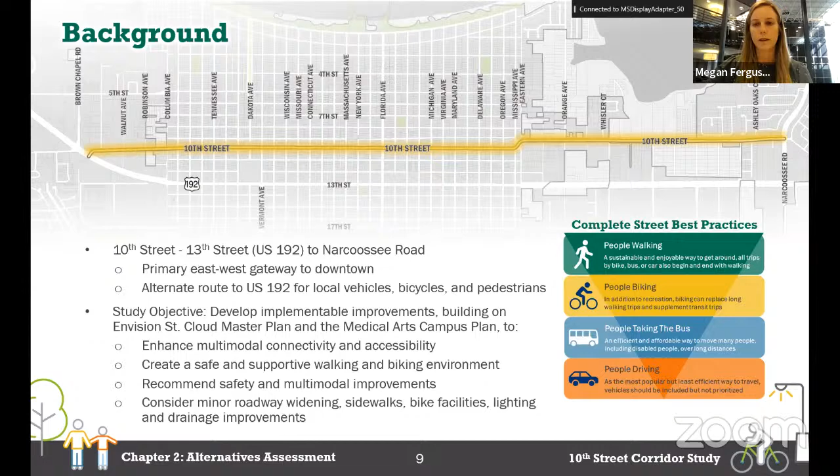One thing we wanted to note up front is that the approach is to not take any new right-of-way. We would stay within the current public realm, so there's no proposal of taking properties or anything like that.

We're on an 18-month schedule, started last January 2021, so we're about a year and change in. We'll be starting concept drawings after this meeting once we get concurrence on potential ideas, and I'll be finishing that up in the early summer.

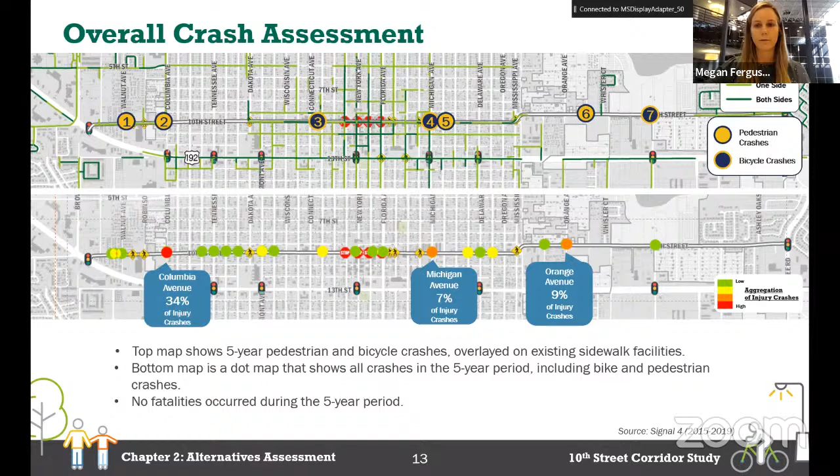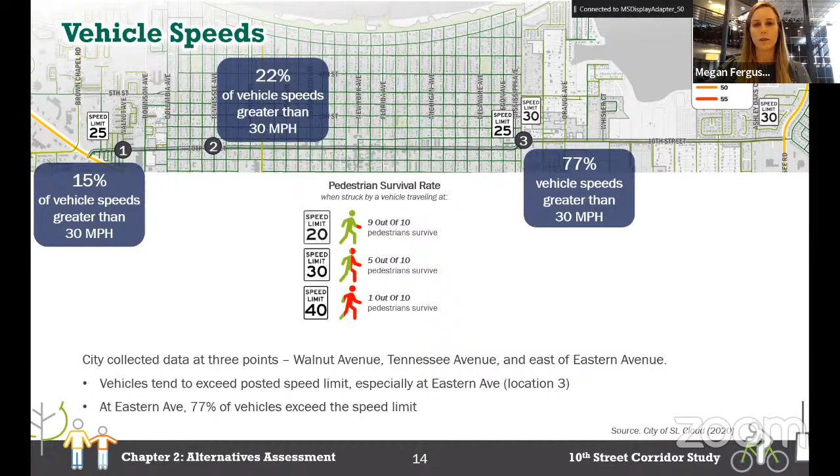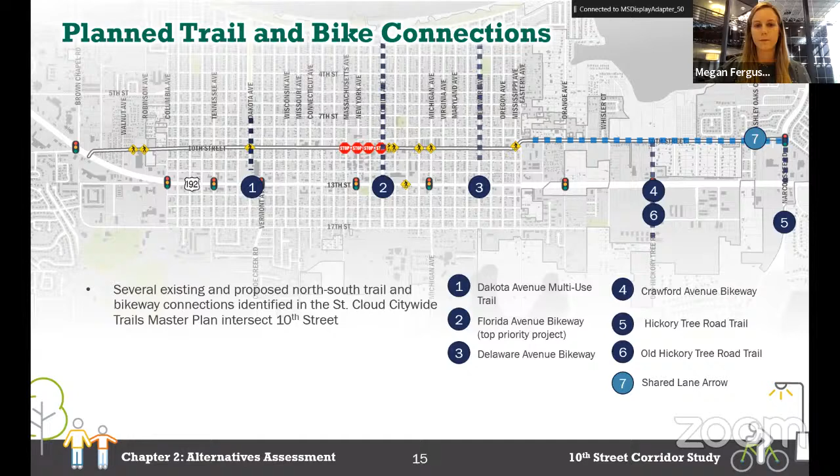All right, I'm going to hand it over to Melissa to talk about the public involvement we've done so far. Great, thanks Megan. Again, my name is Melissa Porcaro, I'm a transportation planner with HDR. I've been really focused on the public involvement pieces here with this study.

So we took those ideas and moved forward with them in our goals and objectives, as well as putting them into our alternatives.

Right now we're in the middle of our alternative survey, so some of what you'll see now the public has also been seeing, through the online survey as well as our public engagement out in St. Cloud. As of the end of the month, we've had over 250 respondents. There's been a lot of positive response about the alternatives and familiarity with roundabouts, as well as our other intersection solutions. We're hoping to get more respondents throughout the month, since the survey closes at the end of February.

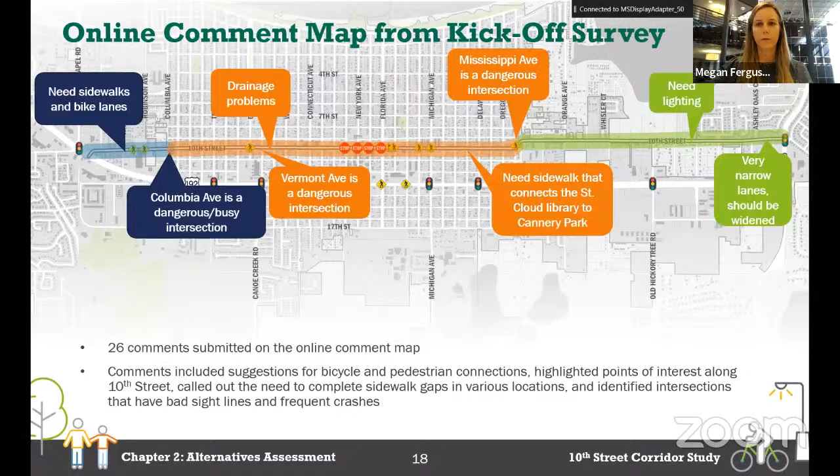So now we're going to open this up for a 5-minute discussion, if there's anything anybody wants to talk about from the project overview phase or the public engagement phase.

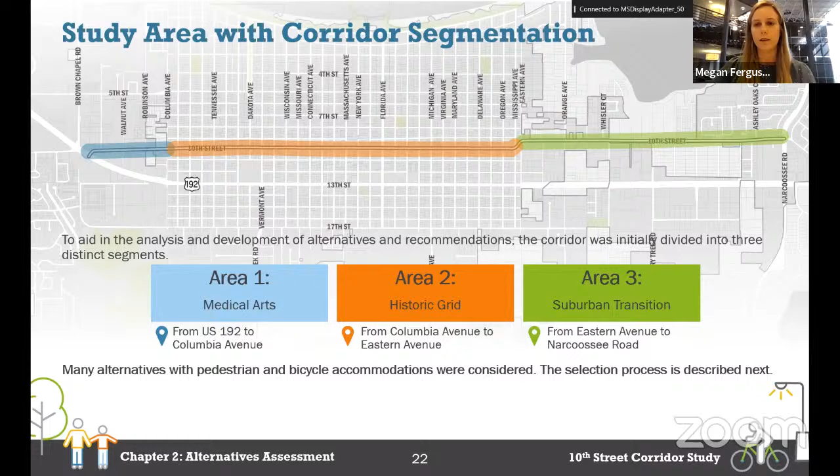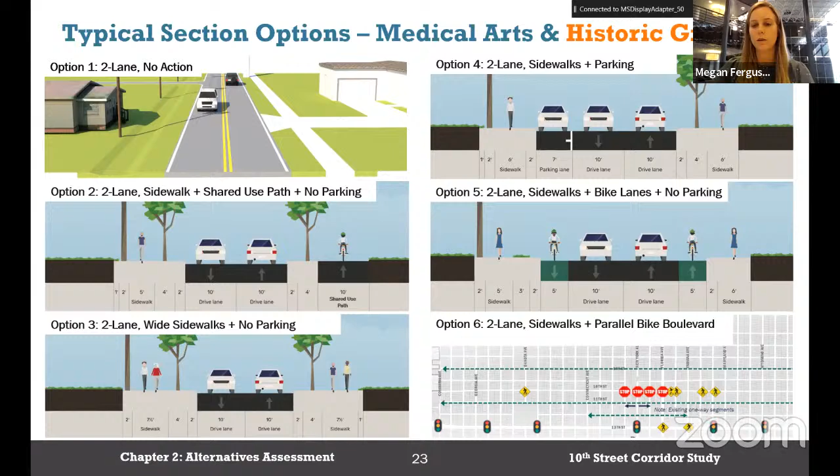In option 5, bike lanes are great because they provide dedicated space, but unfortunately we wouldn't be able to fit a buffer in, given the constrained right-of-way, so it's lower than the recommended 7-foot standard. For options 4 and 3, there are some challenges with finding dedicated space for bicyclists.

Sorry to interrupt. Yeah, people are saying your audio is not good. Could you go back to the previous slide? I think some folks were having audio issues for probably about the first half of your slide 24. Yeah, if you could just kind of re-go over the option issues.

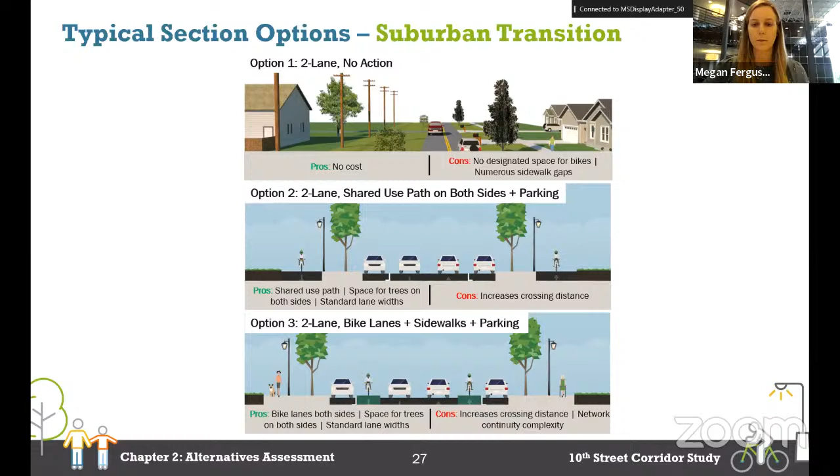So that was the thought process when looking at the menu of options for 10th Street. Through some preliminary discussions with Metro Plan Orlando and the city, we did identify that a shared use path would be the preferred alternative for 10th Street. This is partially because it could be carried all the way from Narcoossee Road to US 192.

Bike lanes are an attractive option potentially in the eastern end. It would be difficult to carry them through the orange and the blue without a buffer, and may lead to a more unsafe condition where cyclists aren't comfortable traveling against vehicle traffic.

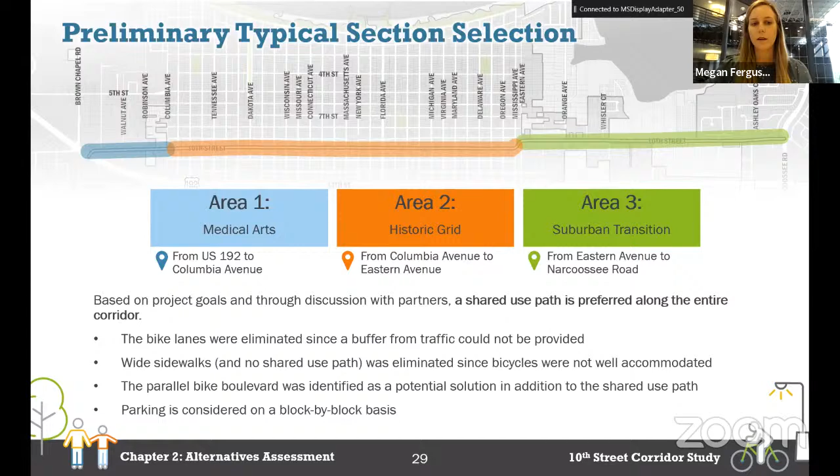We did see some value in considering parking moving forward. We know there's a parking garage going in downtown, but the on-street parking was thought of as supplementing some of the future businesses that might pop up along 10th Street a little bit outside of the downtown area. So you'll see we actually do consider that on a block by block basis.

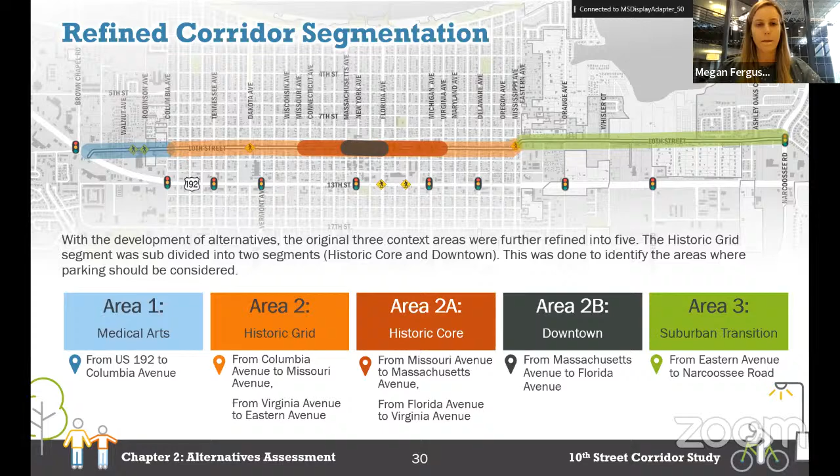We did want to note that there are some challenges with implementing the shared use path. There really would have been challenges with any of the alternatives, but these are just some that are specific to the shared use path option. And we have some images to help supplement what we're explaining here on the next slide.

The roadway center line is not directly in the middle of the right-of-way, so there's more right-of-way on one side of the road than the other. For this reason, the roadway center line may need to shift a little bit. We're talking 2 to 4 feet in some locations to make sure that we meet minimum offset criteria for any new sidewalk or any new trail that's proposed.

The original intent was also to keep the trail on a single side of the road, but for that same right-of-way challenge, it's likely going to need to cross at one location east of Mississippi and Eastern Avenue.

With the landscape buffers, we intend to make them wide enough to have trees, but we can't really guarantee that there'll be shade trees necessarily. It would be some sort of landscaping.

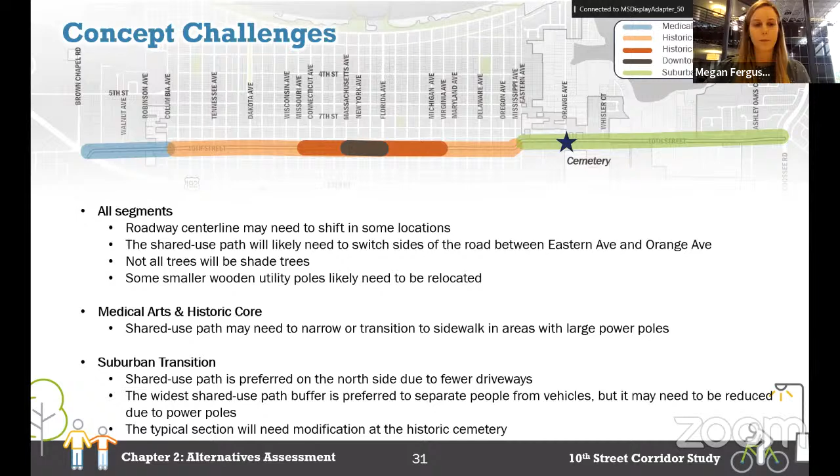So with that, I want to jump ahead to some of these pictures that explain those challenges. In item 1, another challenge would be that the shared use path may need to narrow from the preferred 10 feet down to 8 feet, or possibly even tighter in really constrained areas because of the large power poles on the western end of the corridor. We know there are wooden power poles as well, but we're considering those as able to be moved or relocated, and we'll be asking for feedback if you guys agree with that approach as well.

Image 2 shows an aerial view of 10th Street with those teal blue lines being the right-of-way lines. You'll notice that the south side of the road has more space between that right-of-way line and the road, which explains why the road may need to shift to the south in some locations.

Similarly, with item 3, see that the right-of-way is really bumped up right against the road, so the shared use path will likely need to be on the opposing side. If this is picked up for final design, they'll certainly need a survey to confirm all of these assumptions, but these are the bounds that we're working within right now.

In relation to the larger metal power poles, I know we do have a couple members from OUC on the line, wondering if they would be able to provide some insight from their end. Another comment from Paula Stark, talking about relocating the power poles probably being necessary. And then we have another chat saying the smaller wooden pole distribution poles are much easier to deal with in terms of relocating, which is what we were thinking as well.

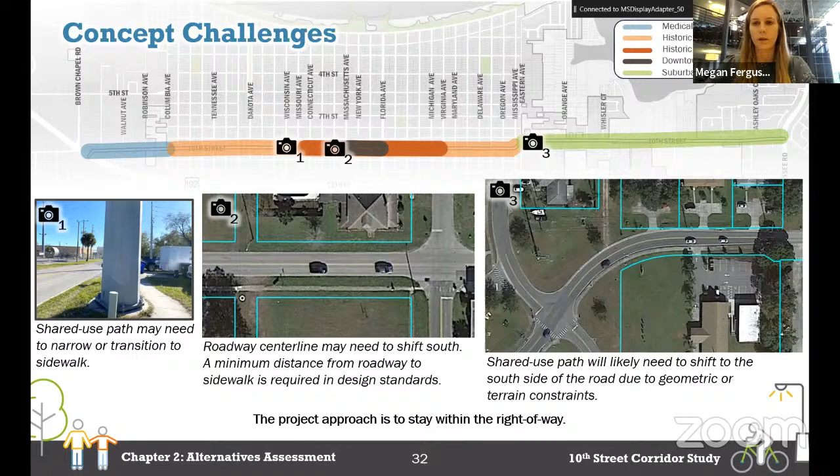So I think that's feedback we can definitely take as we advance into next step discussions with the city. Sounds like we're in agreement that the wooden power poles are eligible for relocating.

Yeah, I don't know, Adonis, if you want to give any guidance. Can you hear me better now? Is our sound better in this room, hopefully? She's asking about undergrounding them. Adonis, do you want to maybe chime in, take yourself off mute? Okay, so yeah, the distribution poles, they are certainly much easier to deal with in terms of relocating or even undergrounding. But it looks like you're talking. Yeah, we can hear Adonis on our end. Adonis, continue. Okay, I don't hear Alex. Oh, you didn't change it. Okay, all right, you guys hear me now? Yes, yes, okay, all right.

Perfect. So yeah, what I was saying is the distribution poles, which are the wooden ones you see along there, they are definitely much easier to work with in terms of being able to relocate them or even possibly look at undergrounding the lines on them. That is a much easier prospect than the steel ones. The steel ones, because they're engineered and designed poles, there would be tremendous time constraints, and we'd have to go through design engineering firms and then more than likely go to the commission for approval. So it just becomes a much longer process to deal with doing anything with the steel poles. The wooden poles, though, present a much easier option.

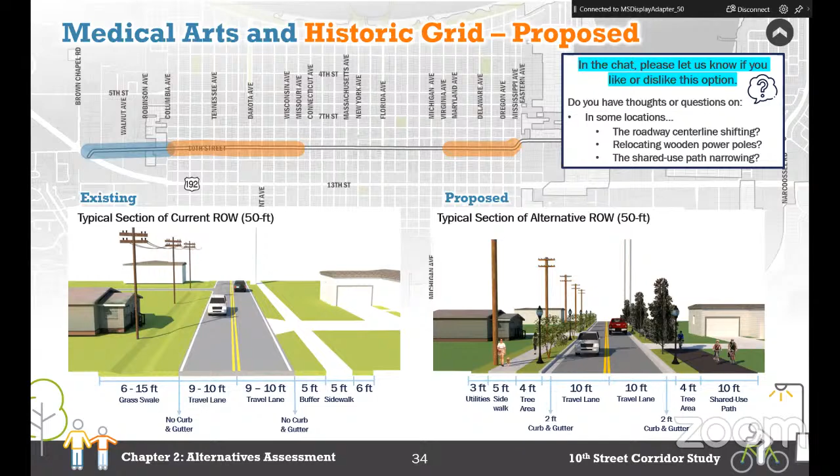Right, that makes total sense, and thank you for explaining it. Of course, yeah, we're going to get these recommendations of alternatives, and then get into the nitty gritty. Our head is just in capital improvements programming now, and I think the city is in support. We have heard regarding funding design, so that'll be within the 5 years. So we appreciate you guys helping to get us numbers that we can start to build on.

Do you want to hear from Emily now?

Good afternoon, everyone. Thank you, Jeff and Megan, for that presentation. I wanted to circle back to my comments in the chat regarding the transmission lines and such, and in certain trail projects where you can prove that this potential connection is an opportunity to not only get cyclists to be able to move safely through a community, but also pedestrians as well.

And Adonis, you seem to be a nice guy, I've never met you before, but willing to work within the constraints of improving this for the entire public. If you do have a constraint, one or two locations, maybe don't totally throw out the opportunity to move said obstacle, whatever that might be. I know there's been some creative solutions with transmission lines out west in their construction, and how they kind of sit on or straddle, if you will, the trail. So I think there are opportunities to get creative if that is constrained.

And just as a reminder too, you guys are doing an excellent job of prepping us for building what hopefully is this road improvement that will increase the likelihood of people shopping and walking and living in the community of St.

Cloud. So I think prioritizing people first, and if that means spending a little bit more money to move a transmission line to have a much better project at the end that's going to last in this community for 30 plus years, it's worth it for that little bit of extra money in the short term that we're going to have to spend. I just wanted to make that point and remind you that's hopefully why we're here doing the work we do in these communities. So thank you again for allowing me to speak. Appreciate it.

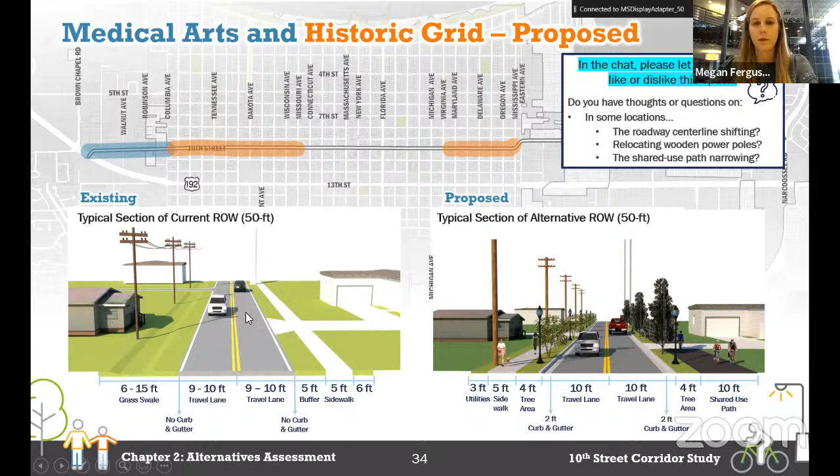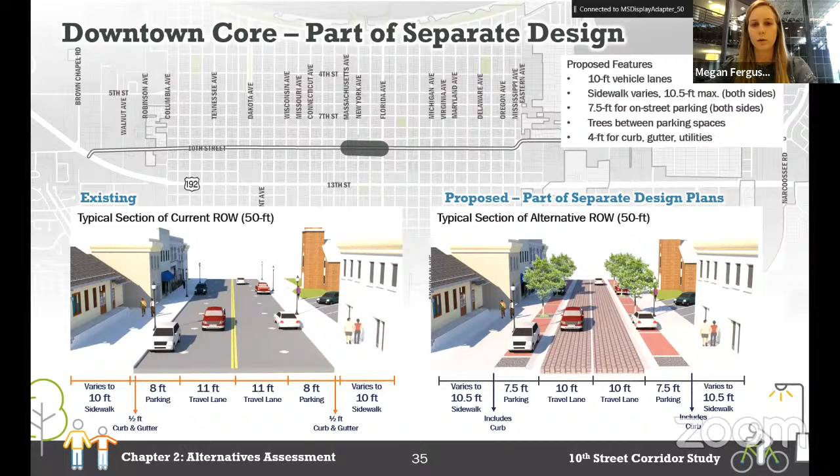Before we do that, we have this rendering of what the downtown area is going to look like. That's part of a separate project and in final design right now, shown on the right-hand side. Since that's a separate project, we're not necessarily asking for new feedback on this, but we did want to show how our potential typicals would tie into it. A good example is in the historic core in this dark orange area, where we have parking on one side of the road, which would be a continuation from the downtown parking. It was strategically added here because we know these are the bounds of the future commercial land use.

We have similar features as the last typical, which is adding new curb and gutter, continuing that shared use path, and maintaining those 10-foot vehicle lanes, which I may not have said specifically in the last slide, but some of the lanes today are only 9.5 feet. So the 10-foot is an improvement to what's out there.

So with that, we'll head back to the chat. Do you all dislike this option or have questions? We know the on-street parking and the integration of the trail with the business fronts might need to be talked through a little bit more.

Also, if anyone on the PBT has thoughts on the side of the street, you can always say which ones would be more ideal or not. It's really tough because, like Aaron talked about, that block by block approach—we don't want to make it keep crossing back and forth, and we're at that point of trying to assess that. Did anyone have other thoughts on this as far as trying to continue the path, not to connect through and then provide the parking? Do you feel like we've struck a decent balance here with this cross section?

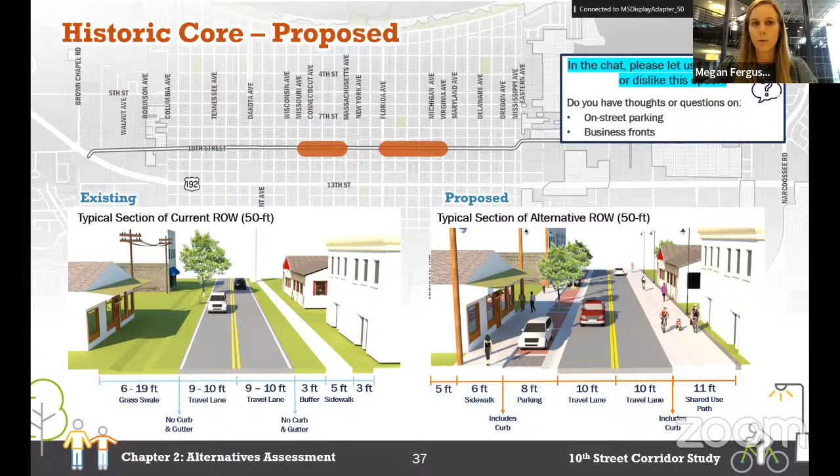The last section we have to share is the Suburban Transition, which starts just after Eastern Ave and extends to Narcoossee. This is where we have more right-of-way available. Same improvements as before, maintaining those 10-foot travel lanes, continuing the shared use path, but we have a recommendation here that the shared use path be on the north side of the road for most of the way.

There's a single driveway for the subdivision on the north side, but on the south side there are multiple driveways to private residences. So to keep the chance of conflicts low, we'd like to see the path on the north side.

We are showing pretty wide buffer areas from the roadway, with an 18-foot tree area on the left and a 19-foot tree area on the right. The approach is to get people and bikes as far away from cars as possible, but there may need to be some variations in that buffer if there are any geometric or topographic constraints.

We also note there's a historic cemetery in this area, where the buffer does get constrained back down to about 55 feet. We want to be sure not to encroach whatsoever into that area. So that's one location where we'll start narrowing the trail, possibly going to a sidewalk if needed to avoid any impacts there.

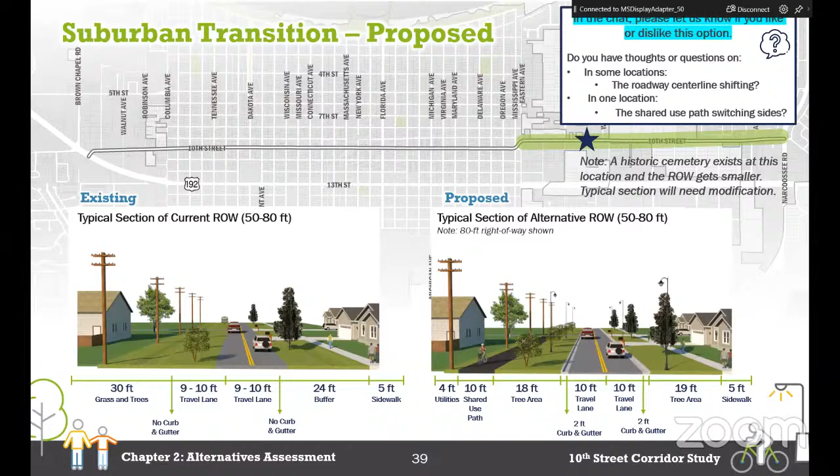And Megan, one more thought. I think I've seen the survey for the north side of the cemetery, and there's about 5 feet between the property line and the fence, and the city would be willing to get engaged in an easement there if that could get us a full 60 feet. So hopefully we can keep the continuity going. Great, thanks, Erin.

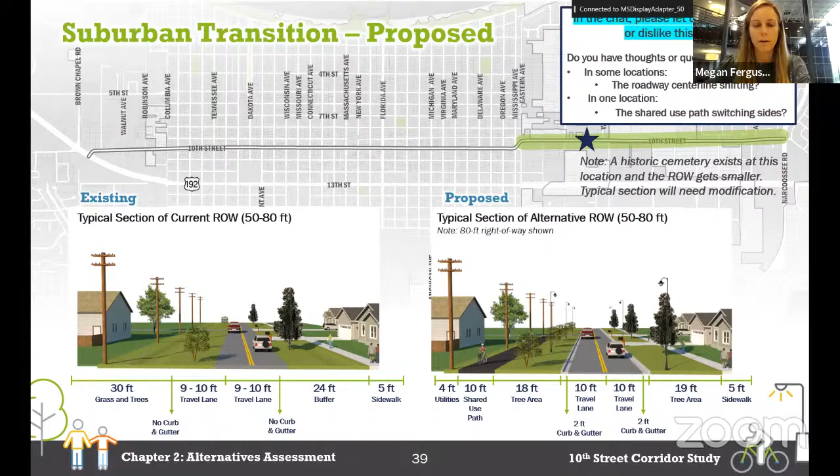Okay, so we have about half an hour left. We do have some survey feedback to talk about before we get to the intersection options. I'll let Melissa describe some of the highlights here.

Thanks, Megan. Yeah, so what we've been seeing so far, of the typicals that we've shown, 77% of respondents said that they loved or liked the suburban transition improvements the most. 72% liked or loved the historic grid improvements, and then 68% liked or loved the medical arts and historic core improvements. We've gotten some supportive comments.

They really liked the ideas we had, but some people didn't like the typicals in that they weren't really receptive to the idea. They didn't totally understand that we're not intending to take the right of way. That's been a concern a lot of people have raised in the survey - they think they're going to lose their property or their yards, which again, we're not intending to do. I think that's an area we can improve on, communicating that's not what we're trying to do. But otherwise, everything - the typicals - seem to be really well received.

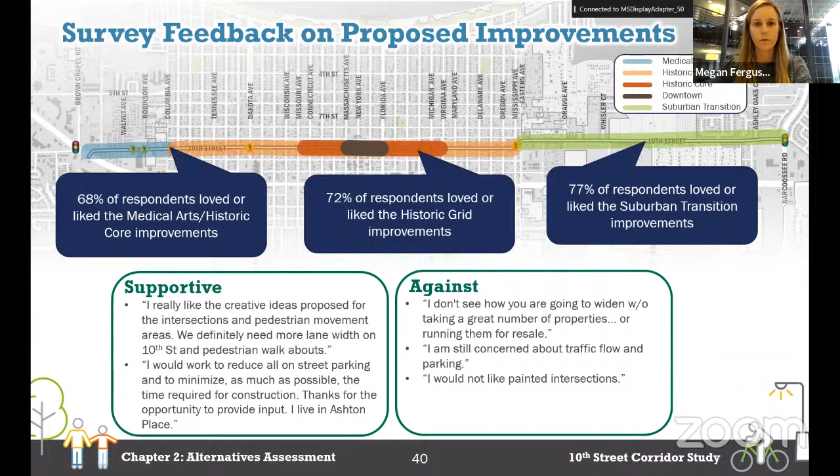Since we had no questions or comments on the last topic, I'll keep rolling to the intersections, which is our last area to cover. There's a lot to take in on this slide, so while we all look at the options along the corridor, I'll explain our approach to the intersection solutions and why we selected certain intersections for treatment versus others.

We looked at this first and foremost from the crash history perspective. We definitely wanted to target intersections like Columbia, Michigan, and Orange, where we saw injury severities higher than other locations. We do know there's some data out there, Emily, we saw that the GIS dashboard for driver yield rates is live by Best Foot Forward, and Michigan Avenue is one of the lowest driver yield rate locations along the 10th Street corridor. So that was the number one way we picked locations, based on safety concerns.

The second was where cross streets had a signal at 192. So you'll see at that same location, Michigan, at Delaware, at Old Hickory Tree, these are opportunities for drivers to make a left turn from US 192 and start heading toward 10th Street. We wanted to make sure once they got to 10th Street it was an indication to drivers that you're now entering this lower speed community, a transition from the state highway system to a local roadway system.

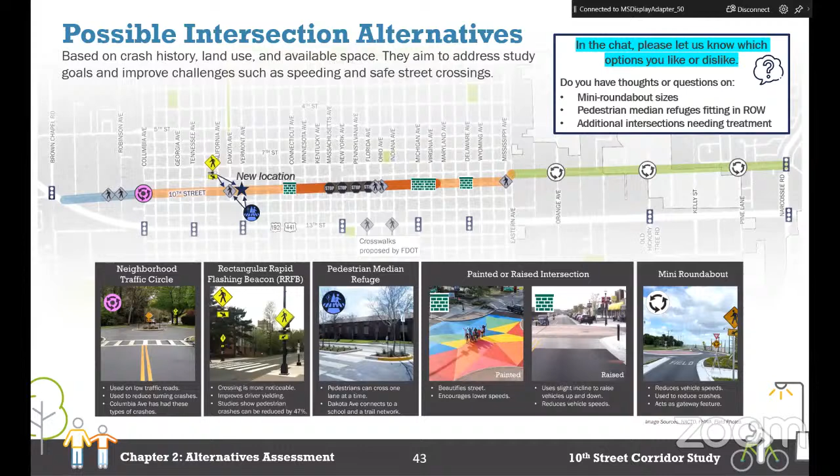Okay, well, we can try to reflect whatever the desire is. For the record, just to be clear, that is the section that is already under design by the city. Correct, yes.

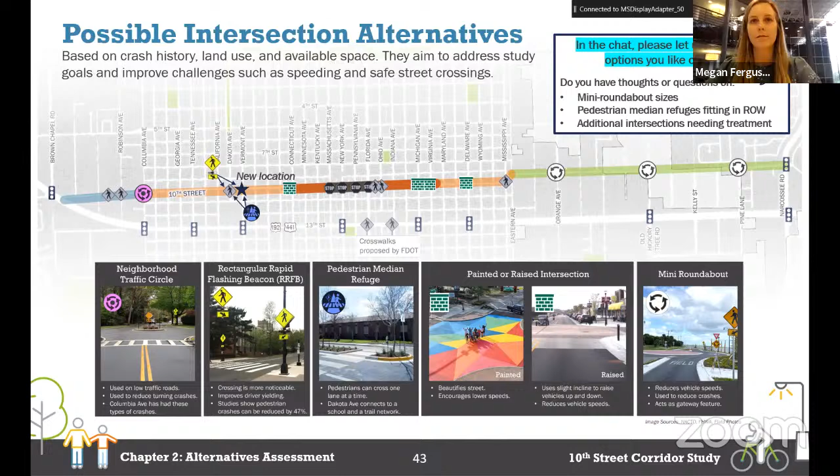I think we've got 13 minutes left, and we want to be respectful of everyone's time. Do you have any other? I think we got a little bit of survey feedback, and then kind of a wrap up. Correct? Yes, so we've gotten some feedback on these potential intersection solutions as well.

Surprisingly, the mini roundabouts and the traffic circle RRFBs and median refuge islands were the most familiar to the survey respondents, with the raised intersections and the painted intersections not being as familiar.

The painted intersections were probably the one that we've seen the least positive or supportive feedback about. I know Emily in the chat made a comment saying that painted intersections can be more muted colors. When we were picking that picture, it was very bright and vibrant because we wanted to get across to people that this is how it would look, to give them that visual. But I think some people didn't like how bright and colorful it was in the intersection. Some people thought it would be confusing, which you'll see in some of the open responses below. So definitely a more muted tone might have been a better way, but there were also, on top of the familiarity, supportive comments about the roundabouts as well, like we mentioned before.

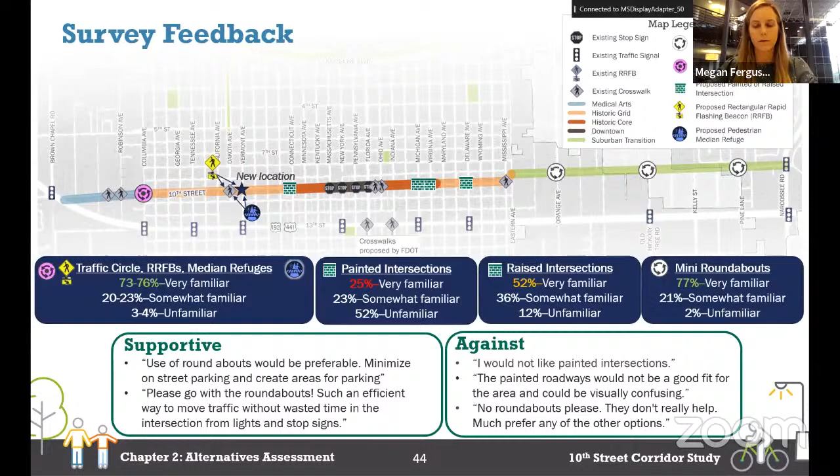So with that, we'll take any last questions and wrap up and transition to public comments.

See any final comments, Melissa, or do you look like we're good? Yeah, Lorena said great presentation, thank you. And as a reminder, the department's focus is more on target speeds and pedestrian safety, and she gave the name of who's leading the effort, so if we want to contact him, we can. Thank you, Lorena.